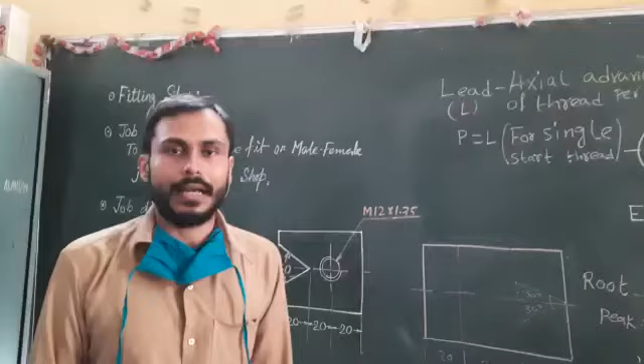Hello students, welcome to the fitting shop. In fitting shop, we will be doing male and female joint.

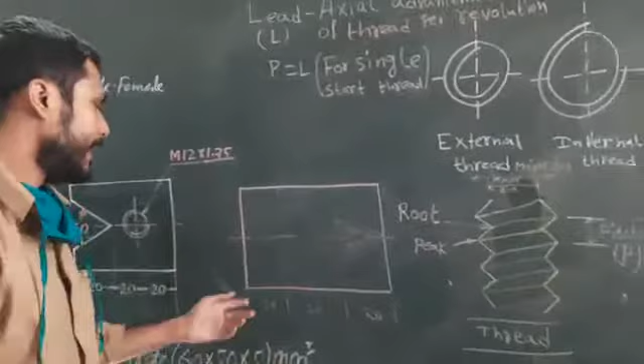Firstly, you will be given a raw material. See, I have drawn a picture of the raw material. The length of the raw material will be 60 mm and the width will be 50 mm. And on that raw material, we have to mark a line at 20 mm, and that 20 mm also.

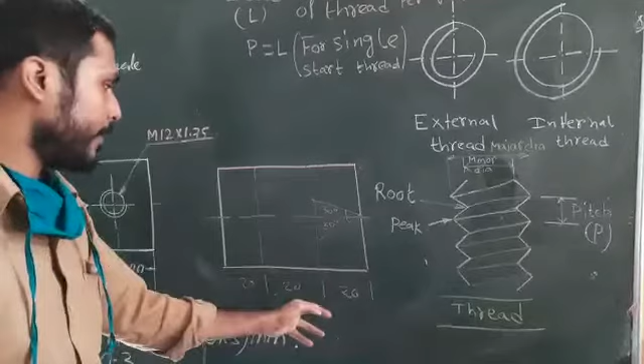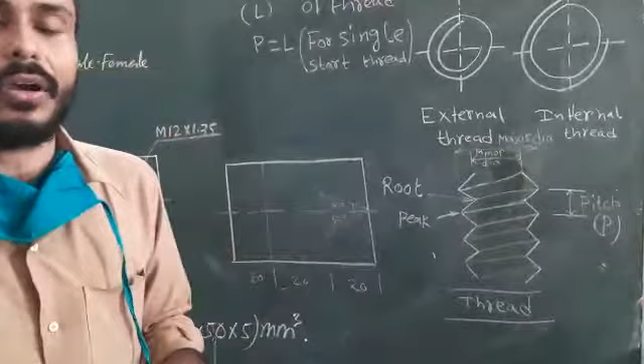From the end, we have to draw two 30-degree inclined lines. After the lines are drawn, it will have to be cut by hacksaw or filing. We have done filing. I will show you what is a hacksaw and what is a file. Then after that, this type of part will have to be obtained.

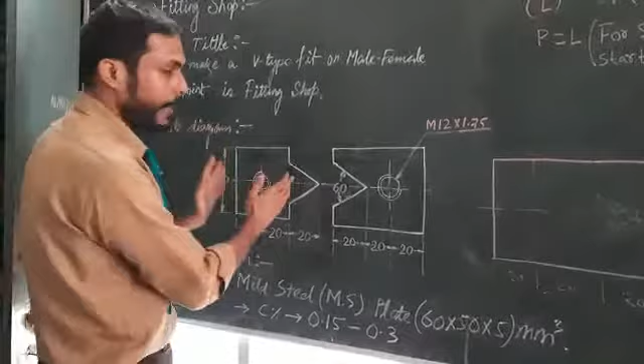So one part, this portion, will be the male part, and this portion will be the female part. Then after joining, it will join actually. So this is the fitting shop. Male will have to be fit with the female part. That's why the name came of the shop, fitting shop.

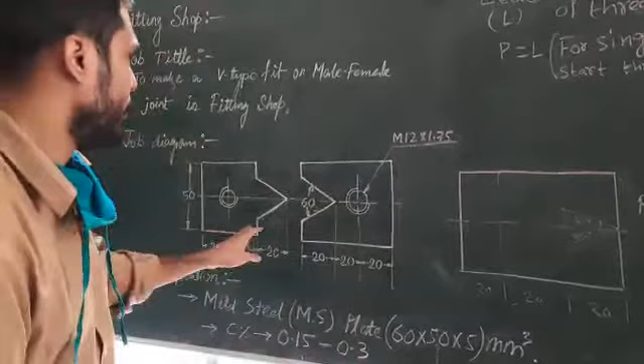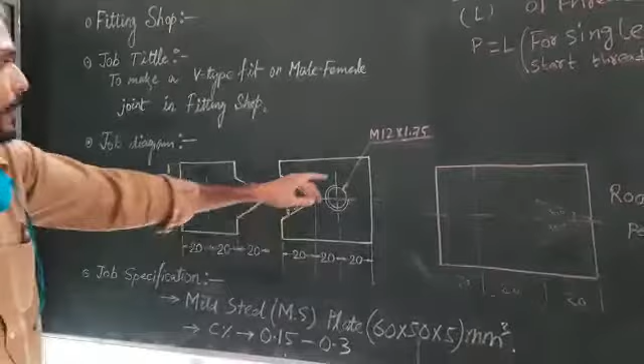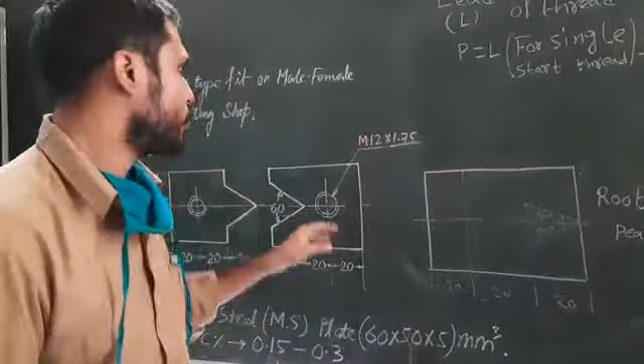And after that, we'll have to mark and drill a hole. On that raw material, we'll have to drill a hole, see the specification of the drill is given. After the hole, we have to cut the thread by means of tap. To cut internal thread, a device called tap will have to be used. So the specification of the thread is M12 into 1.75.

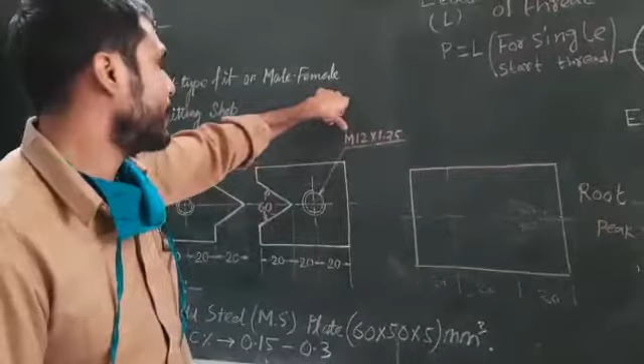That term M stands for metric thread. It is the type of specification of thread. Metric thread of 12 mm major diameter and 1.25 is the pitch. Now what is pitch and what is major diameter?

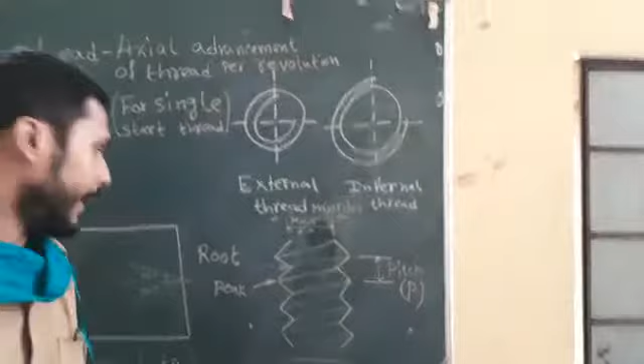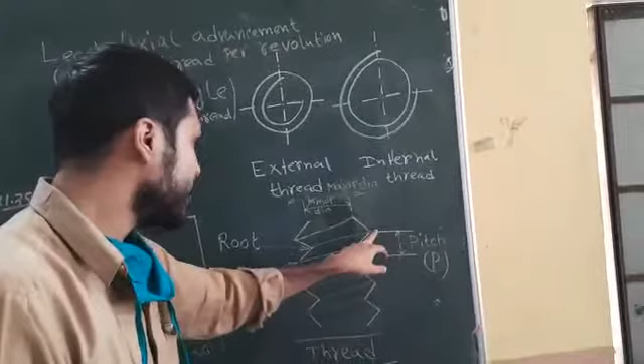I have drawn a picture of the thread nomenclature also. So the maximum diameter will be the major diameter and minimum diameter will be the minor diameter. The pitch will be the distance between the same point of the consecutive threads. So it is one thread, and it is another thread. The similar point between two consecutive threads is called pitch.

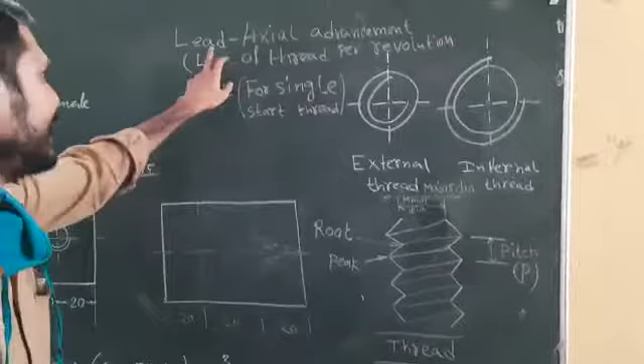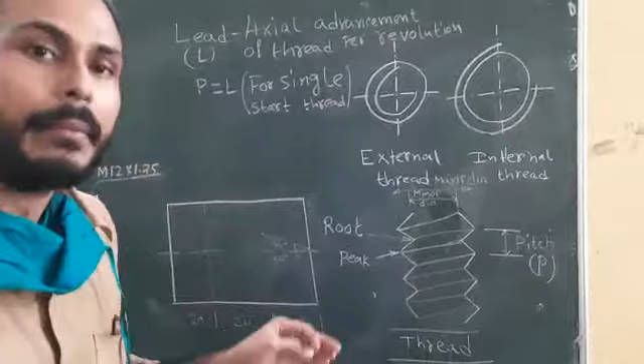Also a term is there, lead. Lead is the axial advancement of the thread when it is rotated by one revolution, and this is called single start thread. The thread we use, they are single start thread. A double start thread can also be used here. So for single start thread, lead is always equal to pitch.

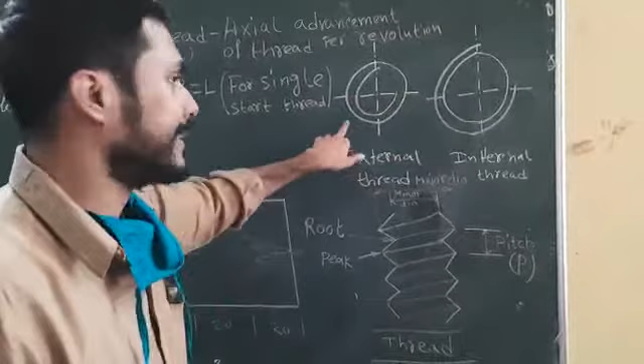And I have also drawn two symbols, of external thread and internal thread. For external thread, the internal circle will have to be broken in the first quadrant, and for internal thread, the external circle will have to be broken in the first quadrant.

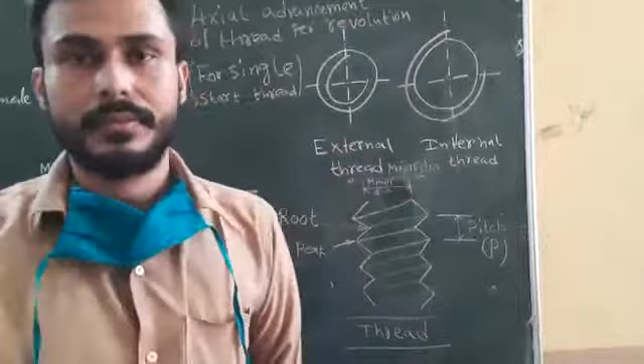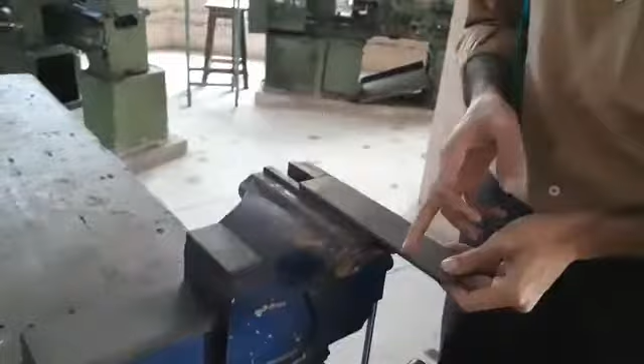So this is the raw material that will be given to you, and this is called bench vise. In the bench vise, you have to fix the raw material first and mark it with a chalk, and then that will have to be cut by a hacksaw.

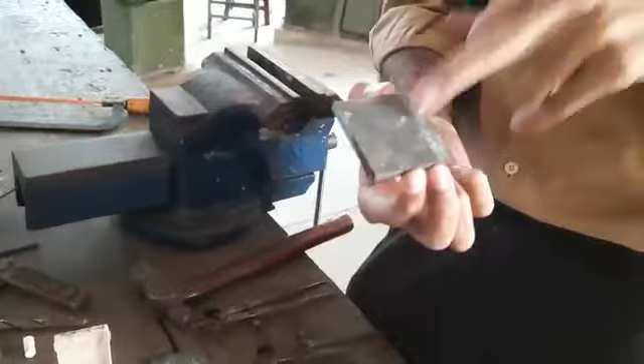After the cutting, this shape will be obtained. That part either will have to be the male part or the female part. By marking it, I have just shown you how to mark. So after the cutting, this will become the male part and this will be the female part.

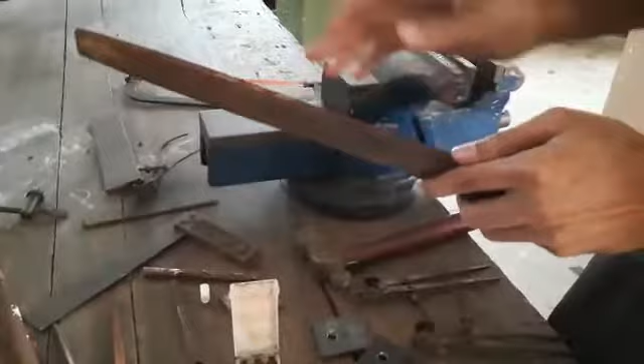And the cutting tools to be used here, I have already shown you. This is called hacksaw. And some files will be there. This is the rectangular file. Actually, files are named by their shapes. So as it is a square shaped file, see the cross section is square, or rather rectangle. So it is a rectangular file.

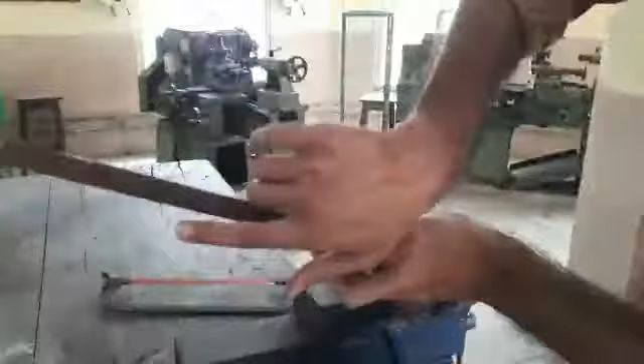And this file is the half round file. See, a half round shape is there. One side is flat shape, another side is half round shape. So it is called a half round file. And this is the triangular shape file. Cross section is triangular shape, so triangular file.

And this is the square file, as our cross sectional shape is a square, so this is the square file. And this thing is called the tri-square. Tri-square is used to check whether the surfaces are perpendicular or not. If the light ray is not passing through it, then the perpendicular is okay.

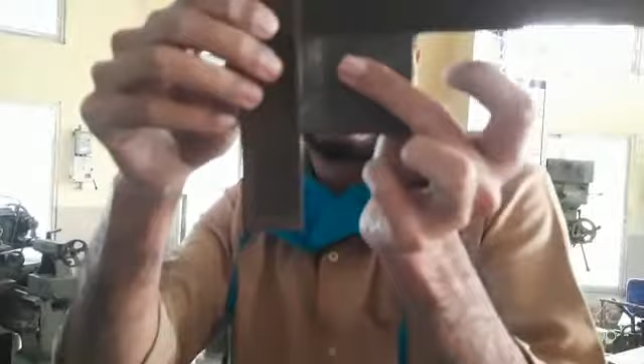But if some light ray is passing, see for this case the light rays are passing. So by filing, by means of flat filing, we have to make the surface flat. Then again, you have to check with the tri-square to make the surfaces perpendicular to each other. So these tools are used.

So another tool to cut the drill hole, taps are used. This thing is called tap. This is the tap handle, and these are the taps. So three types of tap will be there: first tap, second tap, and third tap.

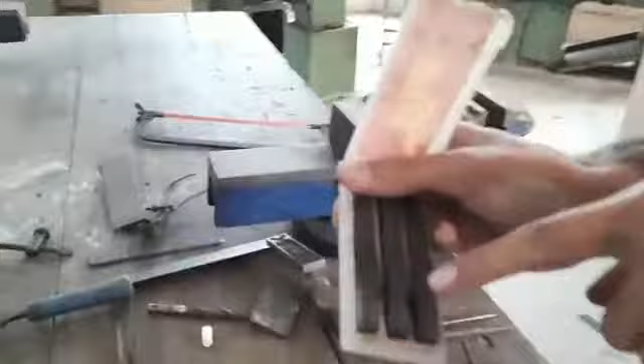Casually it is said, but this is the taper tap. This is the intermediate, this is the final finishing tap. So firstly the more material will have to be cut, then the intermediate tap will have to be used, then the final tap to finish the cut material will have to be used.

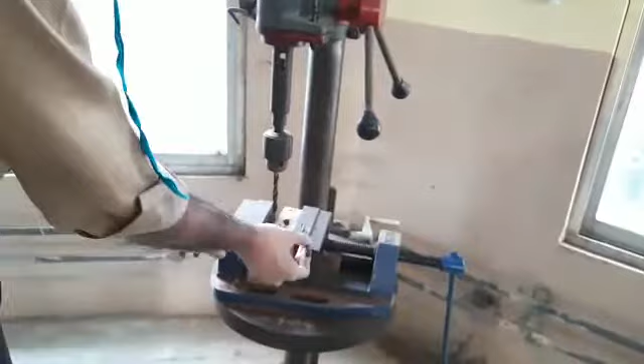So firstly, before tap, we have to do drilling also. We have a drilling machine also. In the drilling machine, this thing is called the drill bit. So the drill bit will have to be fixed here, and the job, as I have already shown you, the raw material will have to be fixed between the jaws of the vice of the drilling machine.

Then it will have to be cut by down feed. So the raw material will have to be placed here, and then it will have to be cut by means of the down feed of this drill handle. And after the drill, the tapping and thread cutting will have to be done.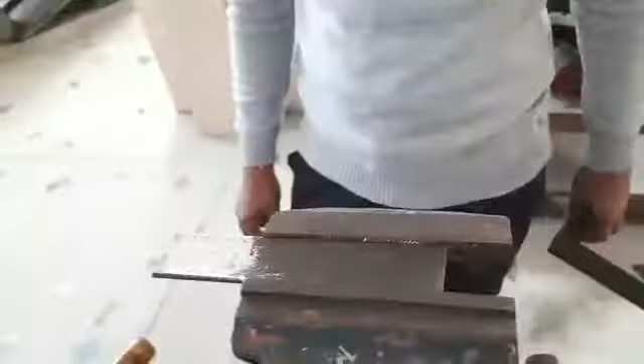So this is our bench vise, and this is our raw material. At first we mark on the workpiece material. Suppose at first with the help of chalk we rub the surface of the workpiece in that manner, and after that we proceed our marking operations with the help of a tri-square.

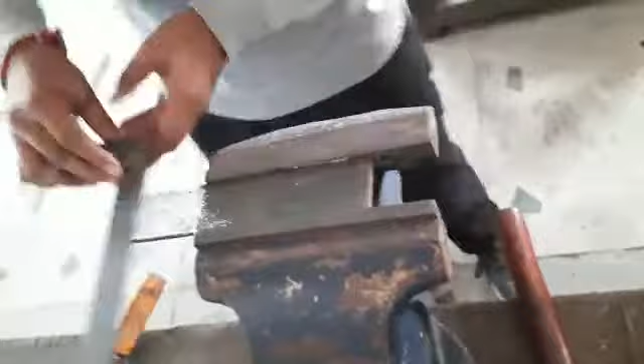We can draw a perpendicular line. That tool is called scriber. This tool is our marking tool, known as scriber. If you observe the surface of the workpiece, there is a definite line, the marking line.

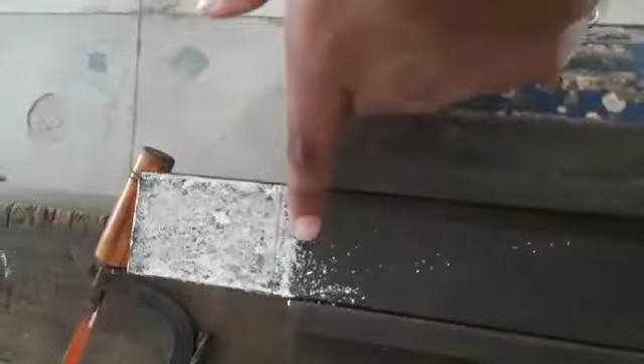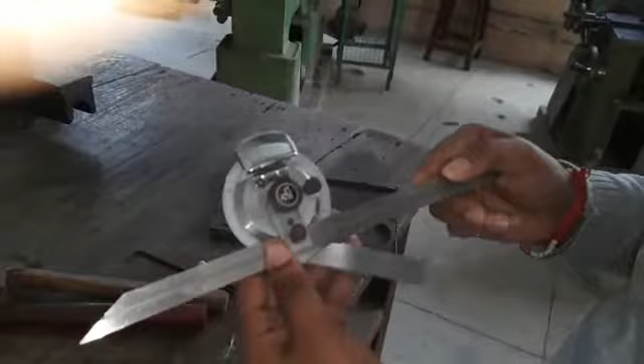So this is our angular measurement device, known as universal bevel protractor. We can perform different types of angular measurement using this instrument. If you observe, there is a degree graduated scale, and the minimum least count of this device is 1 division equal to 5 minutes. This is the blade of the device, and this is the base of the device. Now if you observe, there is a magnifying glass also here.

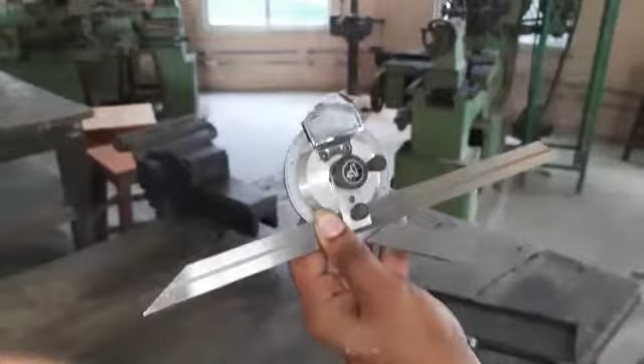Now the bevel scale is matched with the main scale at the 30-degree division, meaning the angle between the blade and base is now 30 degrees. We can proceed with our angular measurement by aligning one side of the plate, and we can easily measure our required angle in that manner, if you observe the operations.

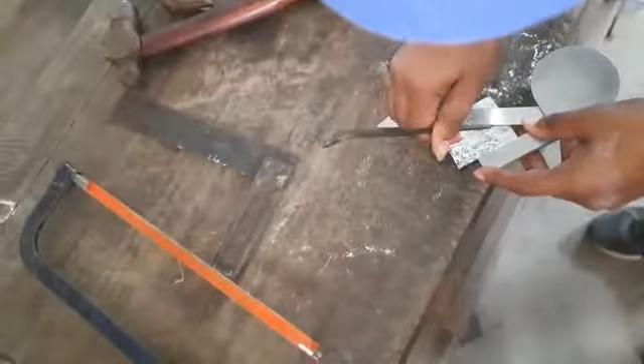By using the scriber, we can mark the 30 degree measurement. Similarly, in the opposite direction, we again mark the 30 degree. In this way we can mark angular measurement using this bevel protractor.

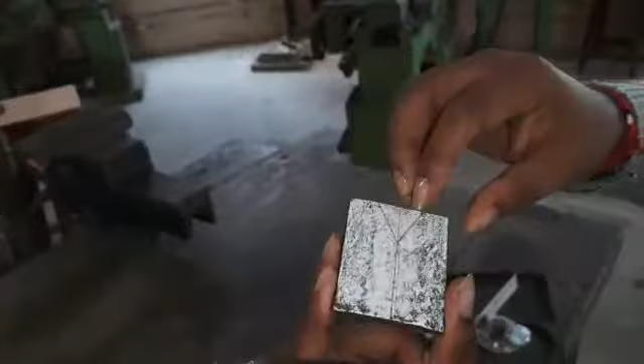If you observe, now the plate marking is our temporary marking process. With the help of scriber we can perform temporary marking, and with the help of dot punch and striking hammer we can perform permanent marking process.

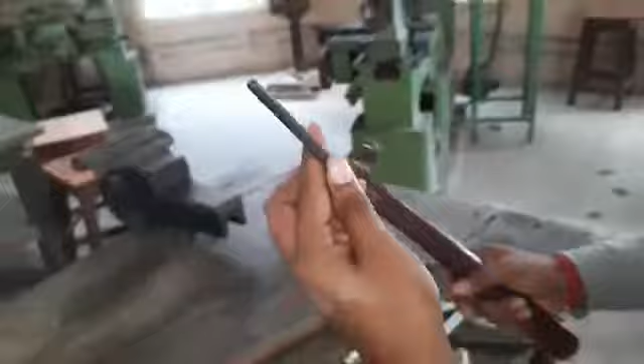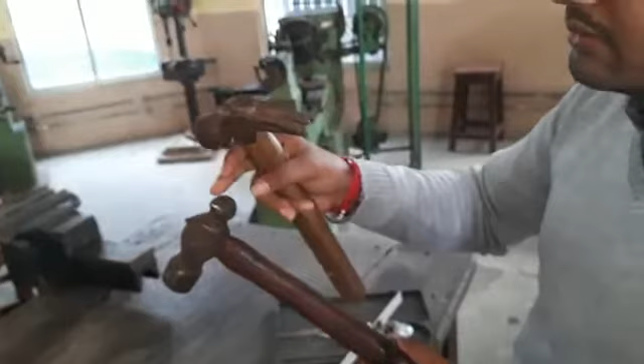So this is our dot punch, and this is our striking hammer. It is a ball peen type. There are several types of hammers in our workshop. This is our cross peen type hammer, and this is our ball peen type hammer. The head of the hammer is ball shaped, that's why it is called ball peen hammer.

And this is our cross peen type, also called cross peen hammer for removal purposes. This is also a claw hammer, used to remove nails. This portion is used to remove the nails, that's why the name claw hammer came about.

And after that we proceed to our next operation. This is our permanent marking operation. We can perform permanent marking by using dot punch and striking hammer.

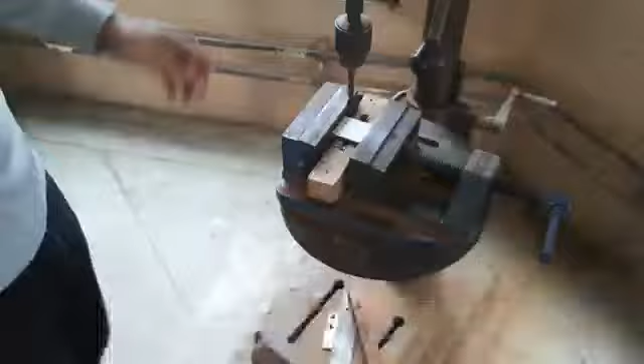This is our vertical drilling machine, already discussed. This is our drill bit, a double point cutting tool. We can perform different types of hole making operations using these drilling machines.

If you observe, this is our drill key. We can remove the drill bit from this drill chuck. This is our drill chuck where the drill is already mounted, just like the lathe chuck on a lathe. This is our drill bit, a twist drill bit.

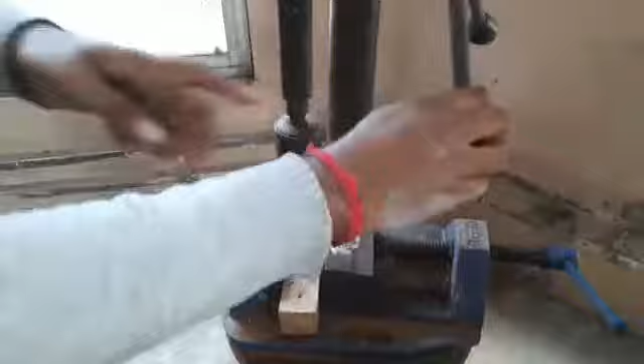One type of cutting tool, a double point cutting tool. If you observe the operation part of the drilling machine, the drill is rotating, and if we down-feed the cutting tool onto the workpiece, it will remove the material, resulting in a hole making operation.

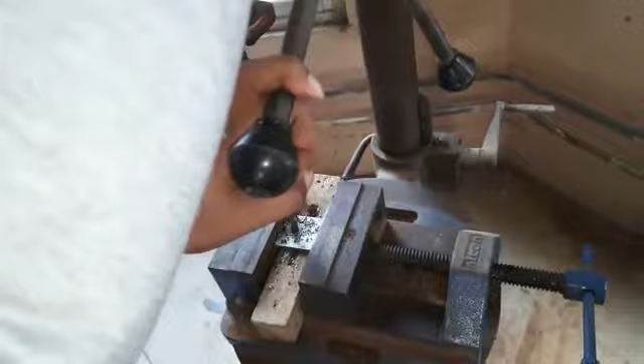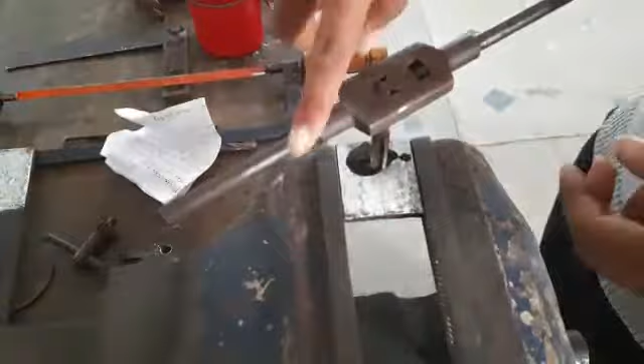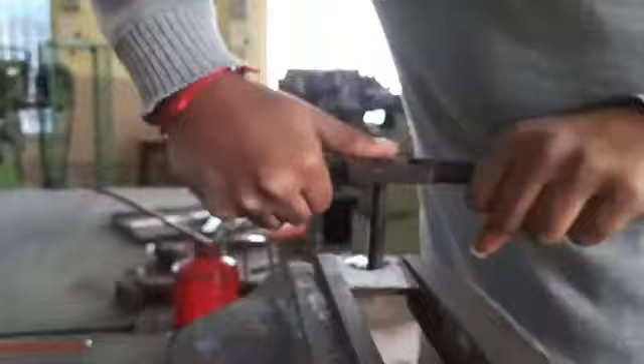We have already inserted our job inside the bench vise. This is our tapping set: this is our tap holder, and this is our taper tap for the first tap. By using this taper tap, we can perform different types of internal thread cutting operations. If we perform it in that manner, we get our desired internal thread, that is M12 by 1.75.

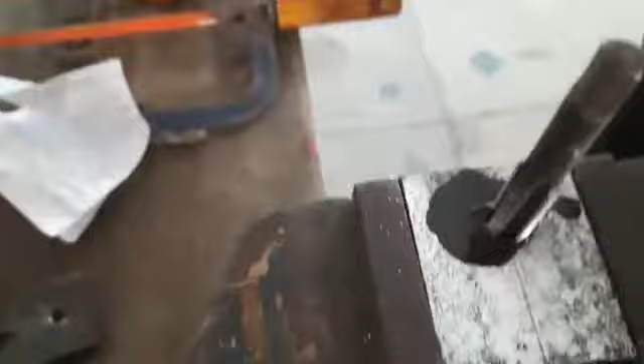Lubricant has also been used. If you can see, the wet surface is there, so lubricant will have to be used during the thread cutting. One thread has been cut with the first tap, and the remaining two taps will have to be used to finish the cutting with the same type of cut.

And then after the thread cutting with the tap, the finishing job will be done.

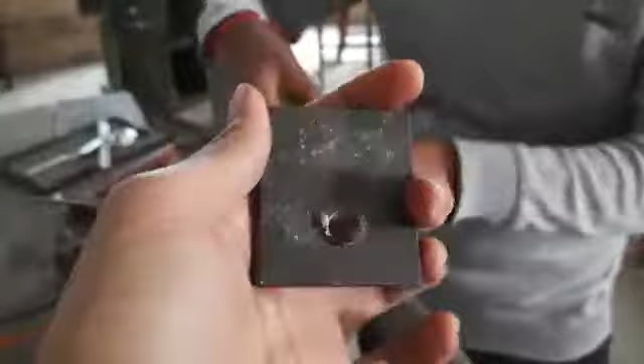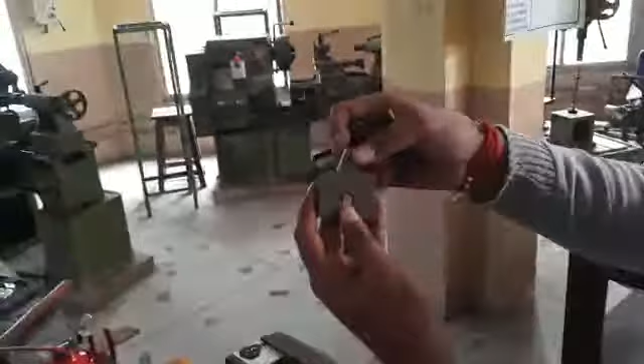So these are our final jobs after the completion of all operations in our fitting shop. This is our female part, with the subtracted part in the middle portion, and this is our male part, with the extended triangle portion in the middle, and there is an internal thread portion. Similarly, the female portion also has an internal thread.

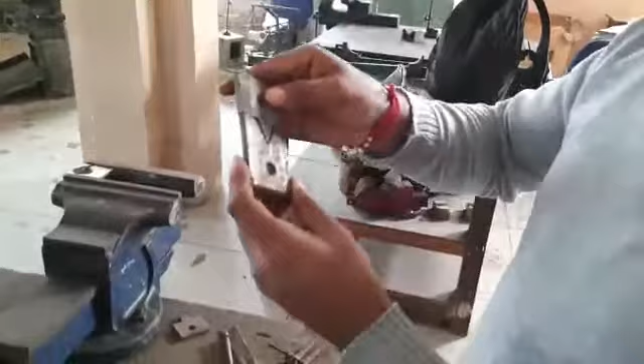If you observe the fitting portions of the job, due to manual error, the gap between the male and female portion should be very minimum. Ideally there will be no gap, and no light ray should pass. If you observe the job, for this case the light rays are passing, but this happens due to manual error. Actually, no ray should pass, and the job should fit exactly, with the male part fitting exactly with the female part.

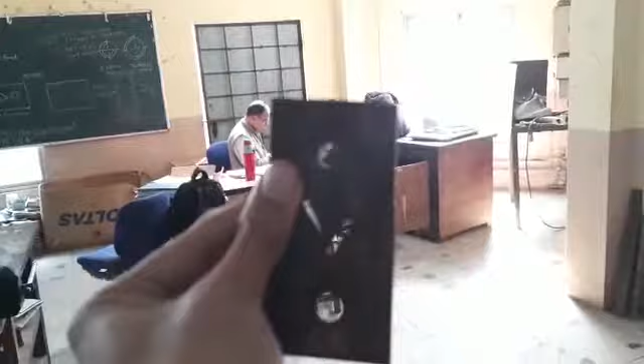So this is your fitting shop. Thank you.